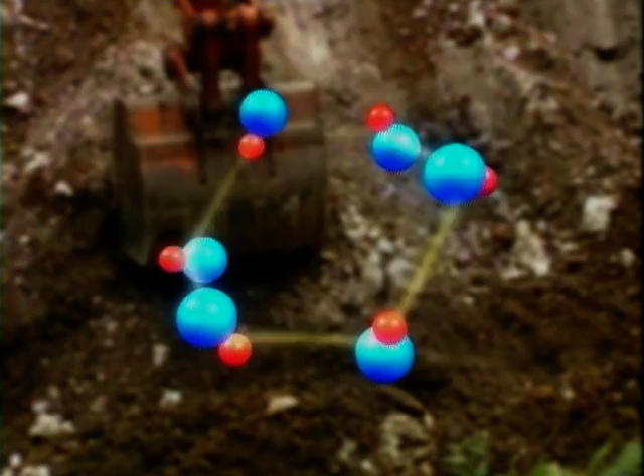HCH stands for hexachlorocyclohexane. It is a waste product that was generated during the manufacture of an insecticide sold under the name Lindane, used in farming and to rid cattle of parasites.

For every kilo of Lindane produced, the process generated 9 kilos of HCH isomers with no commercial value. This waste was dumped with no control, usually on land close to the production site.

Lindane production at the Bilbao Chemicals plant in Baracaldo, Vizcaya, ceased in 1987, but the problems arising from the dumping and lack of proper management of HCH waste in the Basque Autonomous Community persisted.

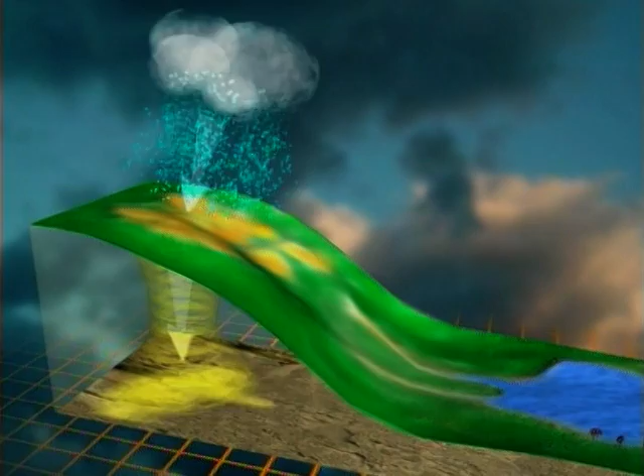As can be seen from the illustration, the waste was carried on the rain and wind, causing it to pollute surface and groundwater and the soil itself. Fumes released from these pollutants due to high temperatures also affected air quality in the area.

Some of the affected areas are used for grazing and crop farming, and others are zoned for urban or industrial development. All these uses entail risks for human health and ecosystems.

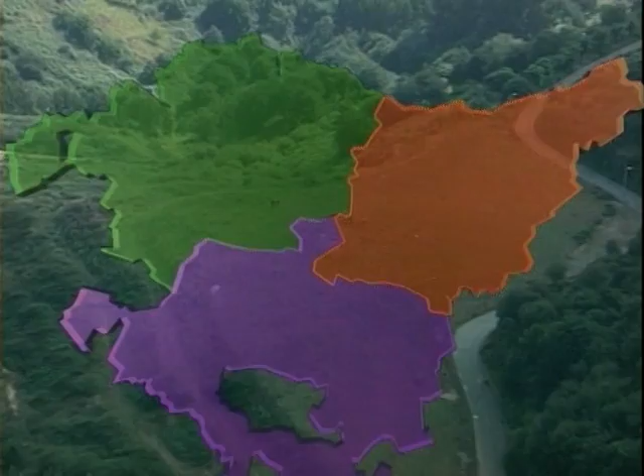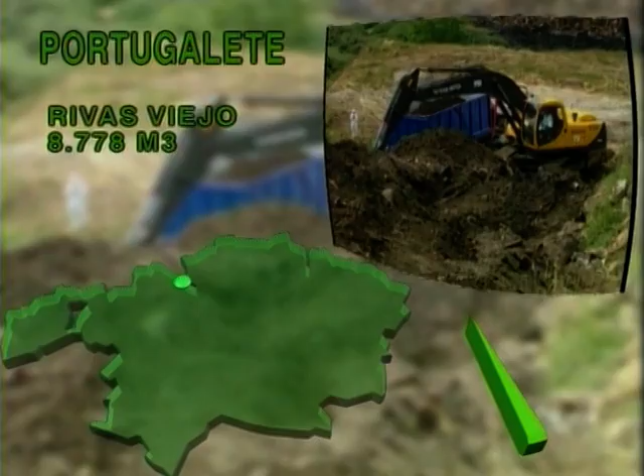Over time, HCH waste dumps contaminated large volumes of soil, especially on the following sites. In the municipality of Portugalete, Rivas Viejo, with 8,778 cubic meters, and Polígono Industrial SIA, with 2,543.

In the municipality of Sestao, Babcock Wilcox, with 5,987 cubic meters. In the municipality of Ortuella, Mina Orgonera, with 784 cubic meters, and Paraje Concha, with 1,092.

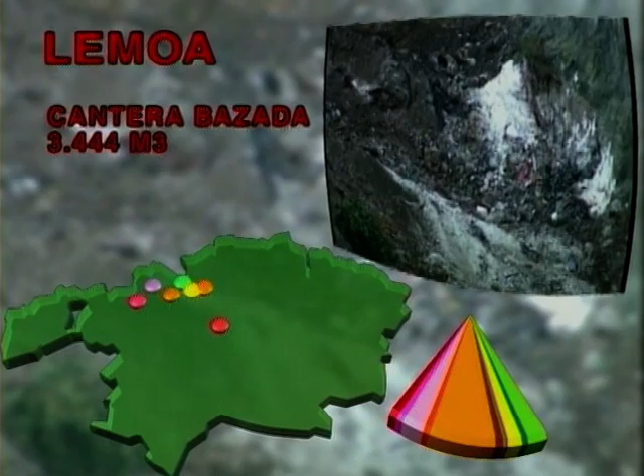In the municipality of Abanto, Cantera Matilde, with 9,104 cubic meters, and Paraje Meastegui, with 2,938. In the municipality of Lemoa, Cantera Bazada, with 3,444 cubic meters.

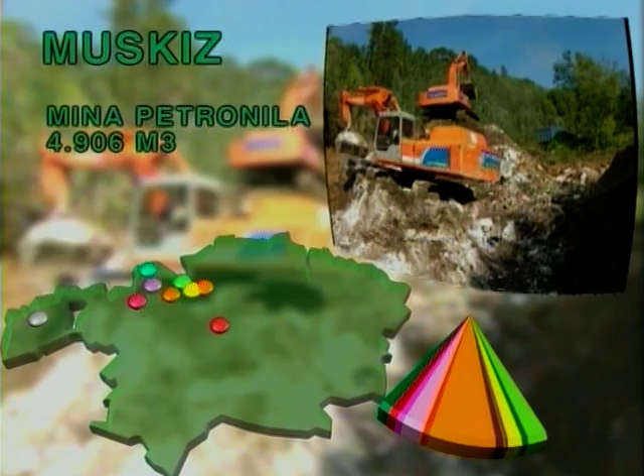In the municipality of Carranza, Paraje Villanueva de Presa, with 615 cubic meters. In the municipality of Muskiz, Mina Petronila, with 4,906 cubic meters.

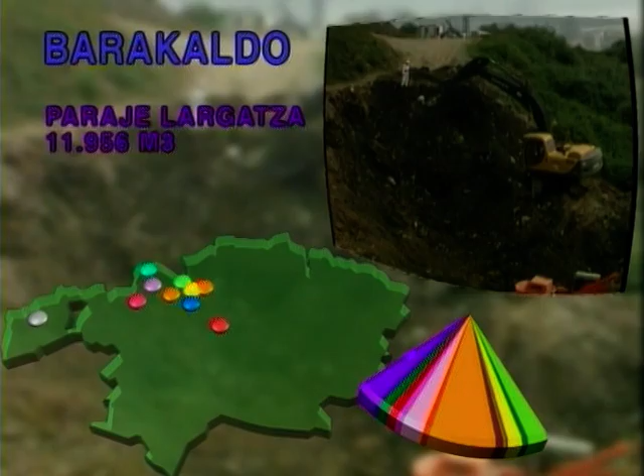In the municipality of Barakaldo, Paraje Largatza, with 11,956 cubic meters. Idanor Bilbao Chemicals, with 78,788.

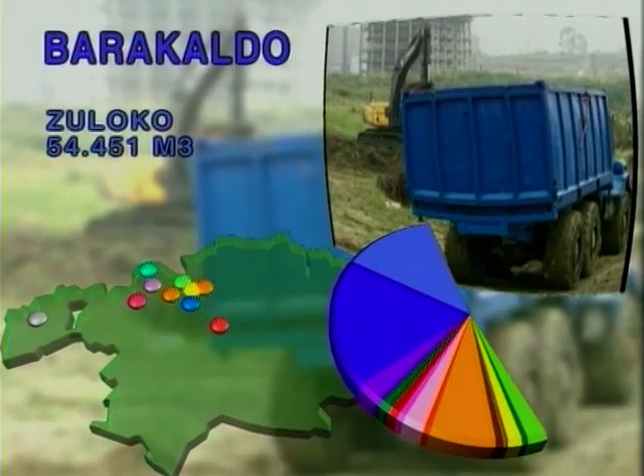Zuloko, with 54,451. Las Julianas, with 2,352. Frade, with

62,530. Vega Galindo, with 43,286. Efersa, with 30,170. Camino Sirga, with 12,482.

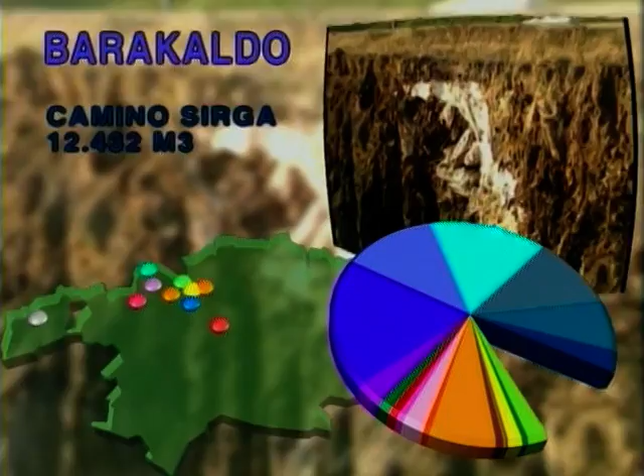Bilbao Exhibition Center, with 5,306. Urban, with 4,974. And Errequeta, with 37,916. These last two sites were contaminated by heavy metals rather than HCH.

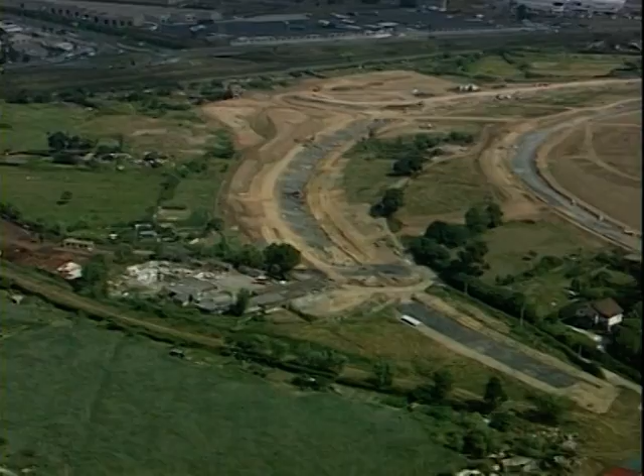The failure to manage HCH waste properly resulted in risks to human health and prevented the land affected from being used for agriculture and commercial or industrial development.

To find a solution to this situation, the Basque Government Department of Land Use and the Environment asked the publicly owned environmental management company, IHOBE, to study how other countries had dealt with similar problems.

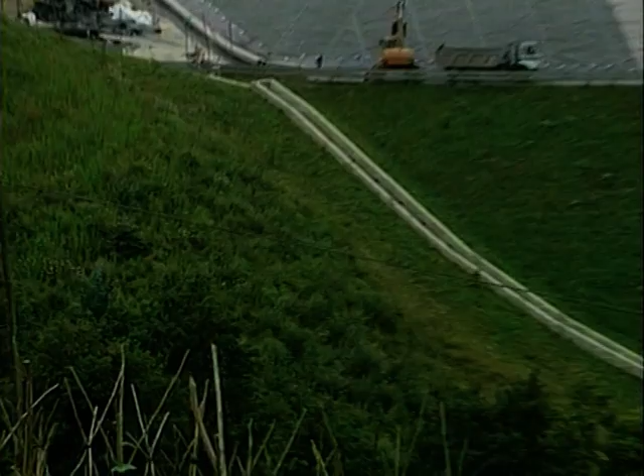The points considered in seeking a solution included environmental impact, proven viability, technical effectiveness, and cost. In this case, the project was co-funded by the EU's Cohesion Fund.

Several options were considered, and it was eventually decided to eliminate the pure HCH waste by a process known as BCD, which stands for base catalyzed dechlorination.

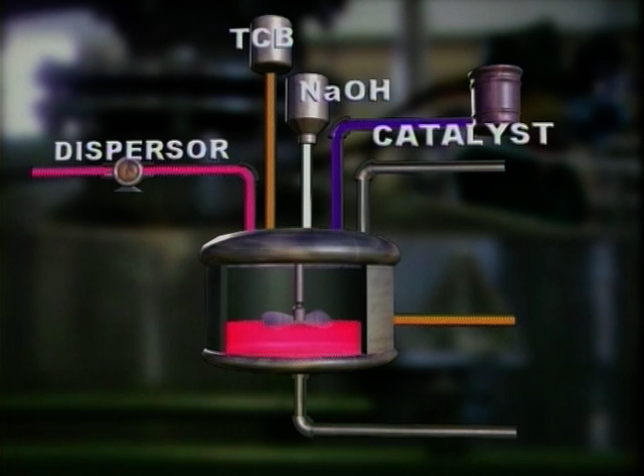And to confine the waste that was mixed with other substances and soil contaminated by uncontrolled HCH dumping in a safety landfill.

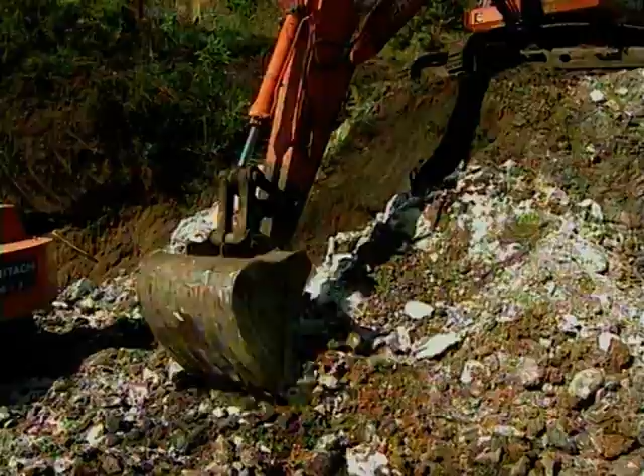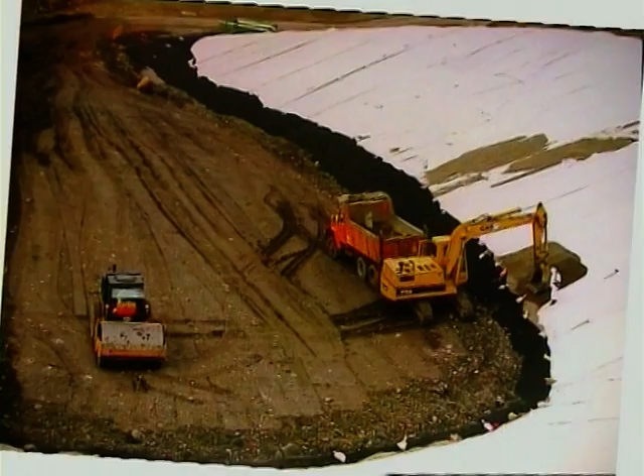This method had been tried and tested at international level and was also used by IHOBE itself in the construction of the Loiu safety landfill, where a total of 113,118 cubic meters of HCH contaminated soil removed from land owned by Bilbao Airport was confined.

In 1995, IHOBE staged a public tender for the preliminary environmental impact study into the location of a safety landfill. The area to be considered extended through all the municipalities on the left bank of the Nervión River estuary and the mining area of Vizcaya, since it was there that most of the sites to be cleaned up by this project were located.

Various options were identified, described and assessed, and the site finally chosen was Argalario, an area which was contaminated and severely run down.

It housed the old Baracaldo municipal solid waste dump for the municipalities of the left bank and lay in the municipality where around 85% of the HCH contaminated soil was located.

This study was subsequently backed up by another, performed at the request of the technical committee set up specifically for this project, taking the whole municipality of Barakaldo into account.

The site selected was environmentally and structurally unsound. The waste from the old dump was unstable. There was pollution of ground and surface water, and noxious gases given off by the site deteriorated the local air quality.

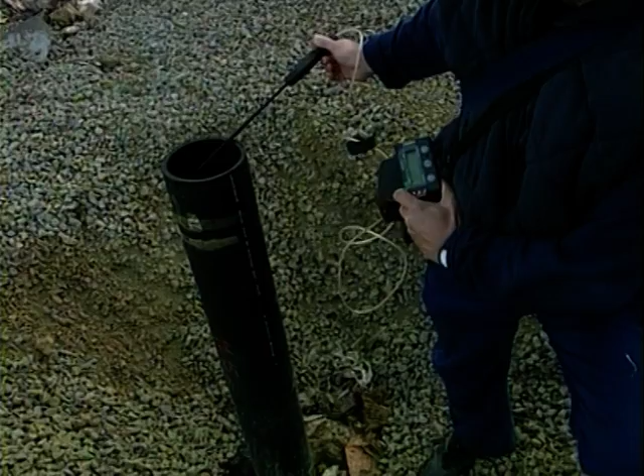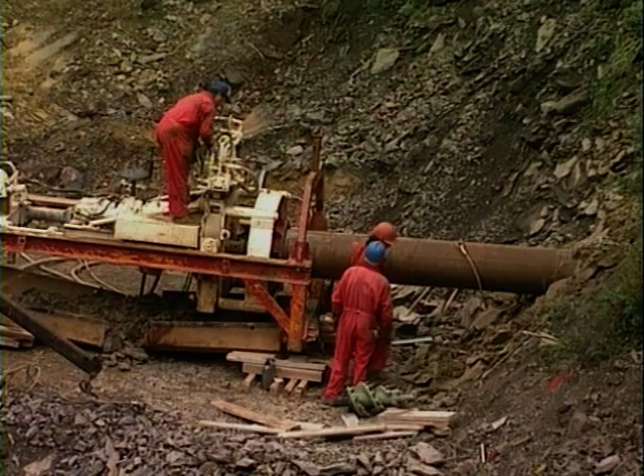The project set up by the Basque Government Department of Land Use and the Environment, acting through IHOBE, was ambitious in environmental and technical terms. Its goal was fully to recover the old dump site before the safety landfill was built. This was to be done in the following stages.

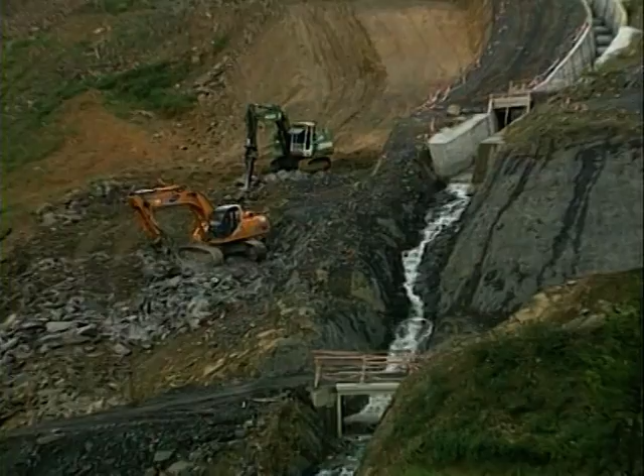The first step was to collect runoff water into a system of canals along the perimeter of the site, then to canalize the river Bortsaco, adapting it to a new course and sizing it in accordance with hydrological calculations.

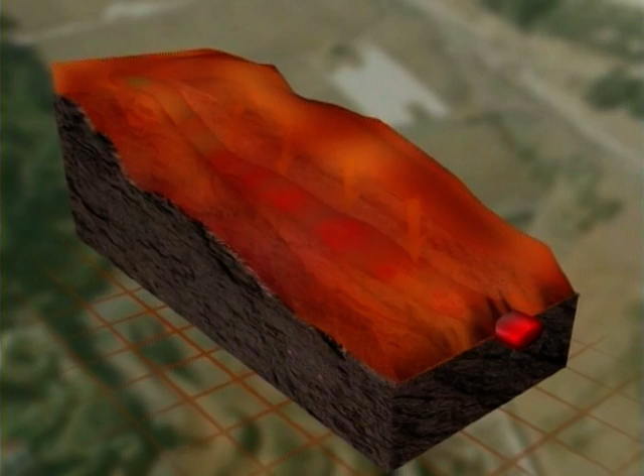The instability of the waste in the dump meant that the internal water table had to be taken down by building vertical gravel drains.

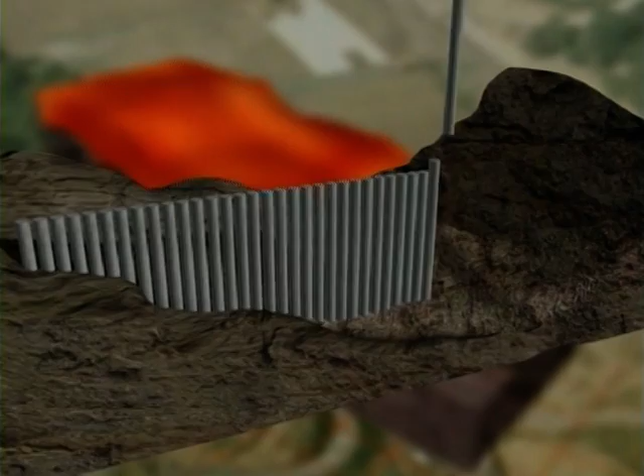At the same time, a reinforced concrete containing wall was built, comprising 49 posts of 1 meter in diameter by 18 meters in height in front of the drainage columns, linked together by 3 transverse beams 69 meters in length, and attached to the natural ground by 38 anchors.

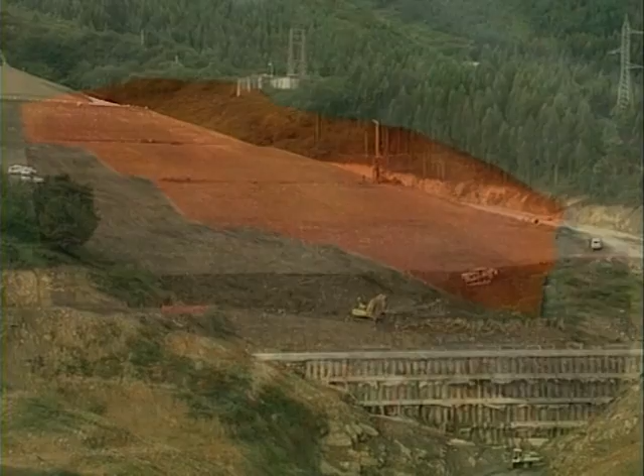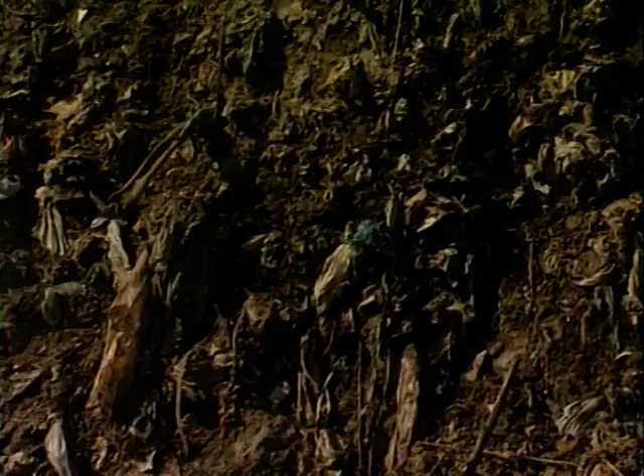When the containing wall was complete, the dump site was reprofiled with berms 4 meters wide, separated by 10-meter gaps. During the work, not only municipal waste, but also industrial and sanitary waste was found.

Collection of leachates from the waste dumped at the site was greatly facilitated by the vertical drains built onto the back of the posts in the containing wall and a barrier-type collector along the foot of the wall.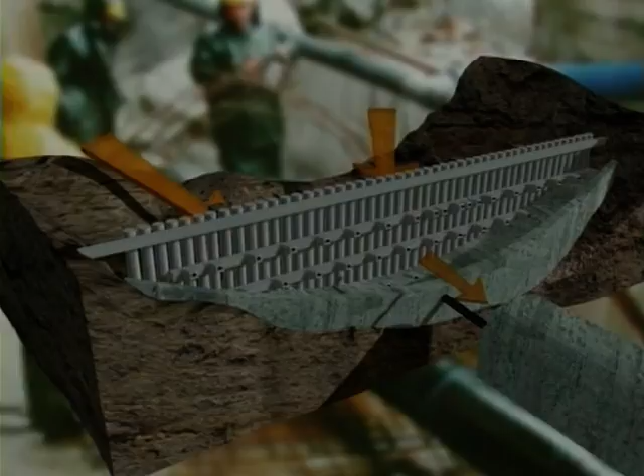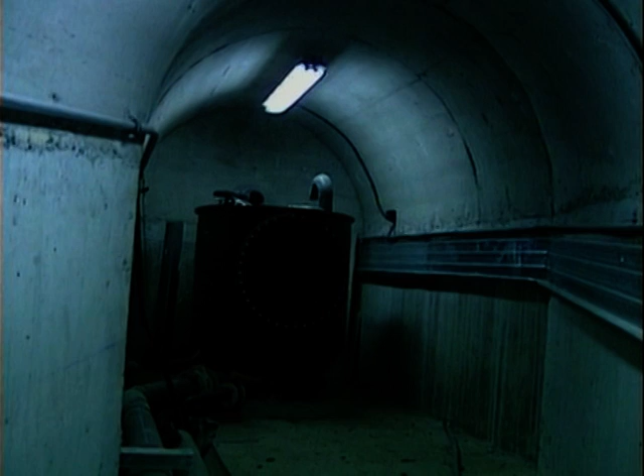Leachates are carried in a reinforced concrete conduit measuring 1.6 meters wide by 2.2 meters high by 230 meters long. To prevent the air from becoming fouled, a 23-meter high stack was built at the end opposite the entrance point to ventilate the conduit.

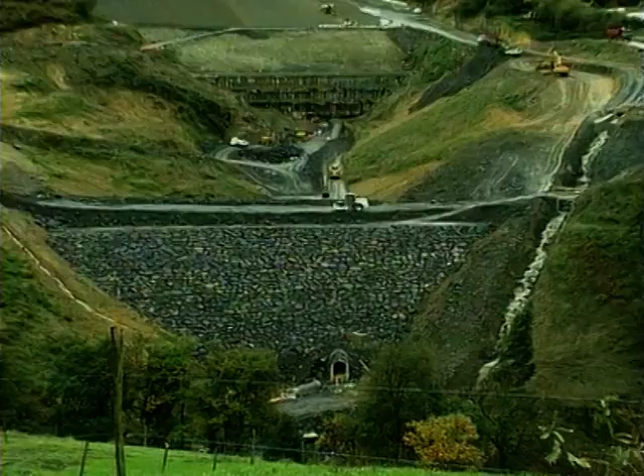This conduit runs under the safety landfill and carries the leachates from the dump in a polythene pipe, which extends from the collector where the leachates converge to the treatment plant.

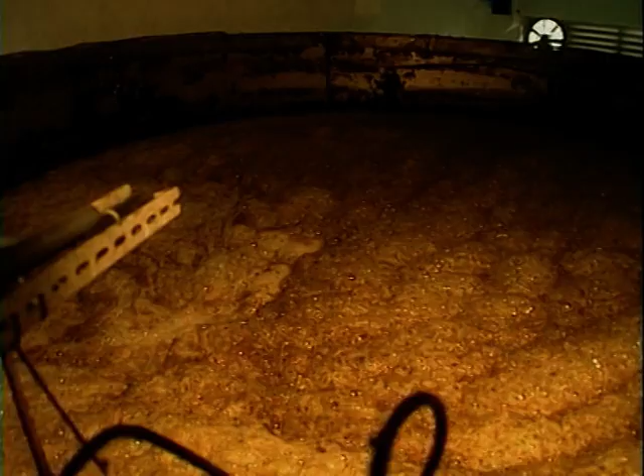A biological treatment system was designed on the basis of analyses of the leachates from the MSW dump and the Basque Government Water Department's requirements for discharges to sewers. As shown in the illustration, this system involves a nitrification process enhanced by bacteria in an oxygen-rich medium to turn ammonium into nitrates.

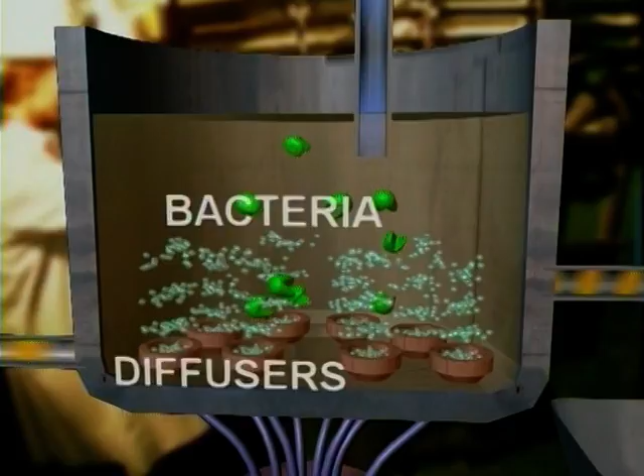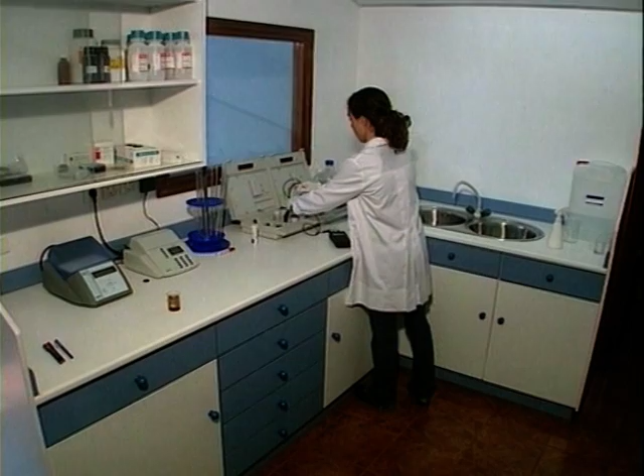The concentrations of the various substances to be tested for are checked, and if there is no problem, the water is discharged into the municipal sewerage system.

Decomposing organic waste in the dump produces internal reactions which generate biogas, including methane and carbon dioxide. This essentially exothermic process is favored by moisture.

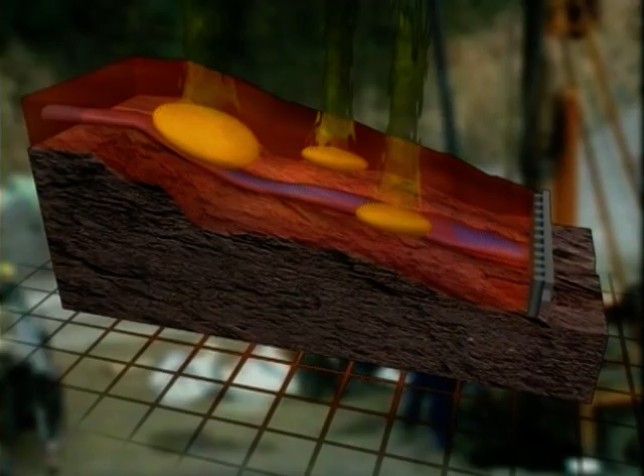Landfill gas can pose major environmental and safety problems for surrounding areas. It also migrates naturally through the various layers of waste in the dump and into the atmosphere, contributing to the greenhouse effect.

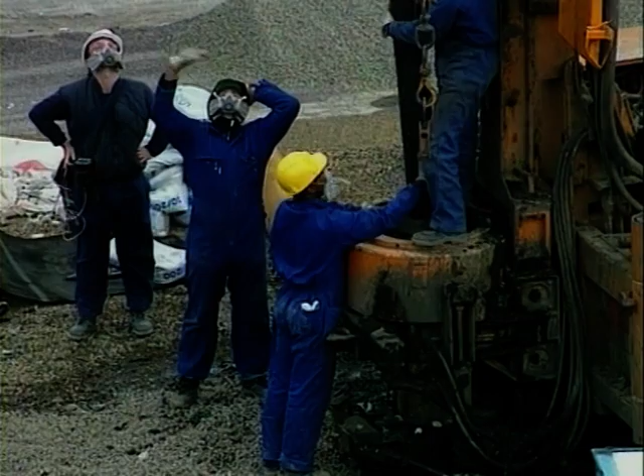The degasification system installed comprises a 30-centimeter layer of gravel over the whole top of the dump and a network of 14 wells connected via polythene pipes to a central exhauster unit.

This unit generates a slight vacuum pressure which draws the biogas into a combustion system, where a burner eliminates it at 1200 degrees centigrade.

Dump sites are capped for two main reasons: to prevent gas from the waste digestion process from getting out, and to prevent rainwater from getting in, thus reducing the amount of leachate produced.

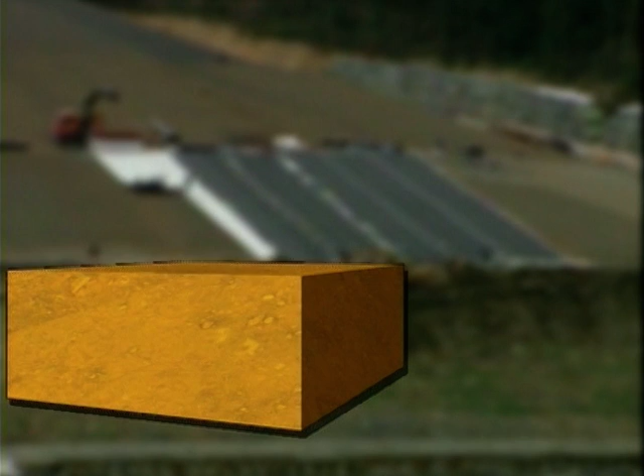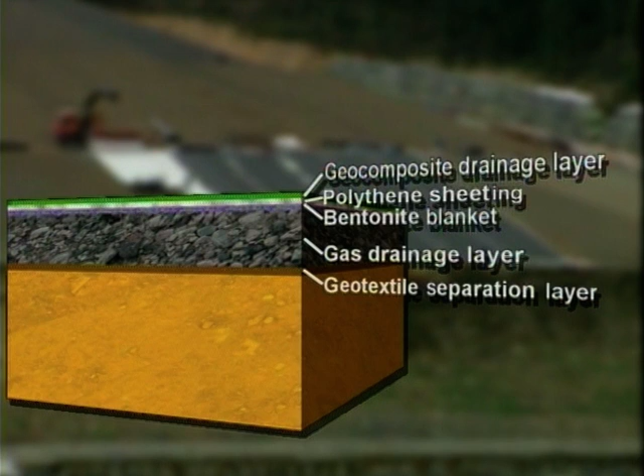This dump is capped with the following layers of material, from bottom to top, including gas drainage layer, geotextile separation layer, gas drainage layer, bentonite blanket, polythene sheeting, geocomposite drainage layer, layer of clayey soil, and layer of topsoil.

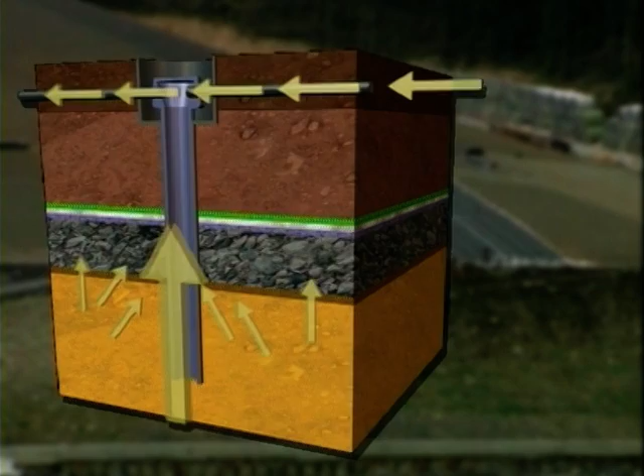The scheme for blending the MSW dump into the surrounding area seeks to achieve two things: to improve the quality of the landscape at the site and to help stabilize the embankments, which have been hydro-seeded and planted out with native species of trees, particularly birch, thus completing remediation of the old Argalario dump site.

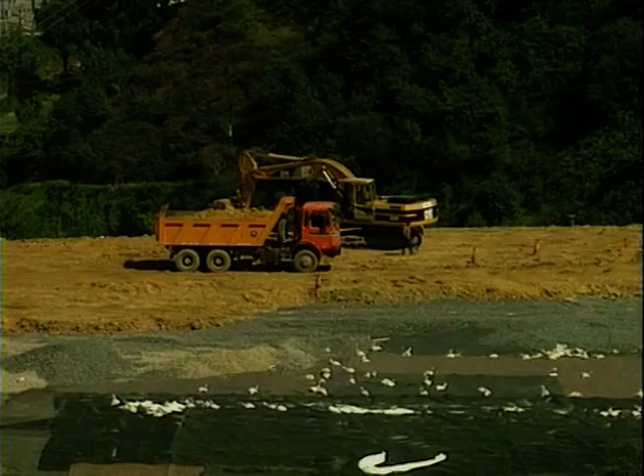Now let us move on to look at the building of the safety landfill itself. Some of this work was carried out at the same time as the remediation of the dump site, but it's described separately here to make it more easily understandable.

A safety landfill is a structure in which contaminated materials can be confined and isolated to prevent them from damaging the environment.

To ensure that surface and groundwater is protected at all times, these landfills are built with a series of sampling points and a continuous monitoring system in a control network.

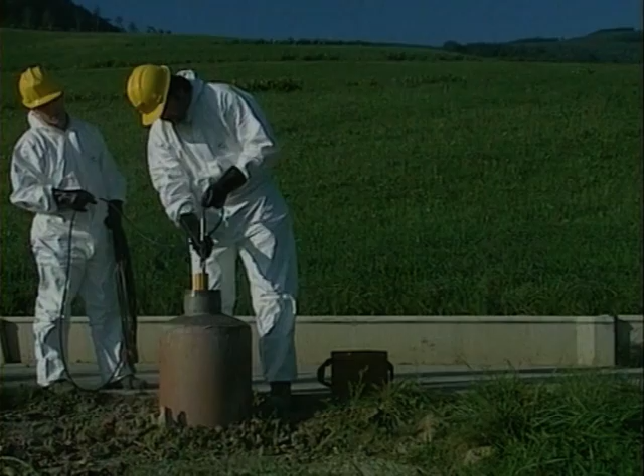The landfill constructed here has a circuit of topographic bases to detect and monitor even the slightest movement in the waste it contains. Inclinometers are also installed to reinforce the measuring system and keep a check internally on the waste.

Leachates from the various layers of waste are collected and carried to an adjacent treatment plant.

Work to shape the safety landfill was carried out at the same time as work to stabilize the MSW dump. Before the work started, 39 oak trees and 6 holly trees growing on the site were uprooted and replanted at the top of Mount Argalario.

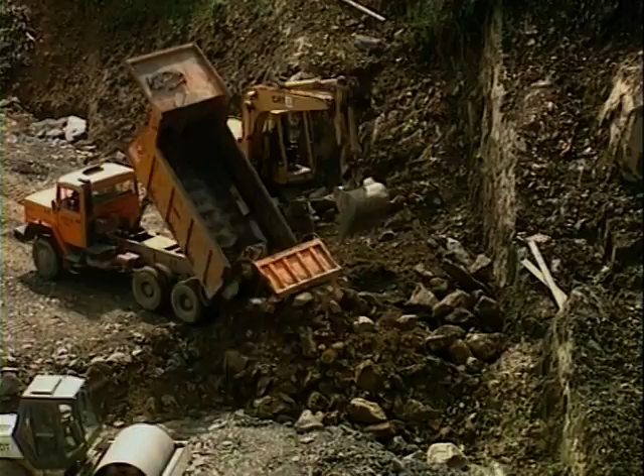Once the site had been excavated to the required depth, the ground was compacted to form a stable floor for the safety landfill itself and the bottom of the leachate conduit.

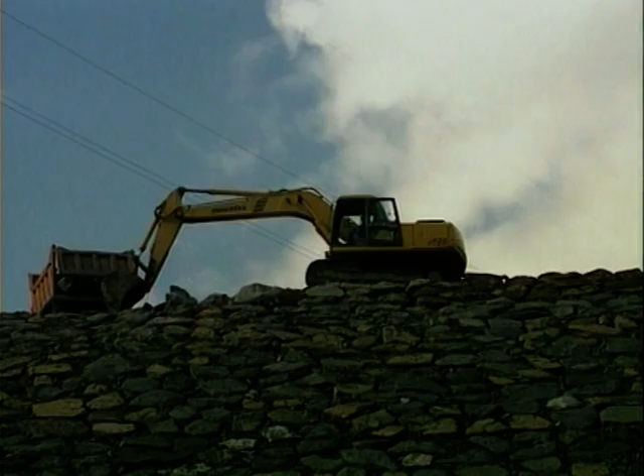The conduit and underground water drainage network were built, then the site was filled in with borrow and embankments were built with the slopes envisaged in the project.

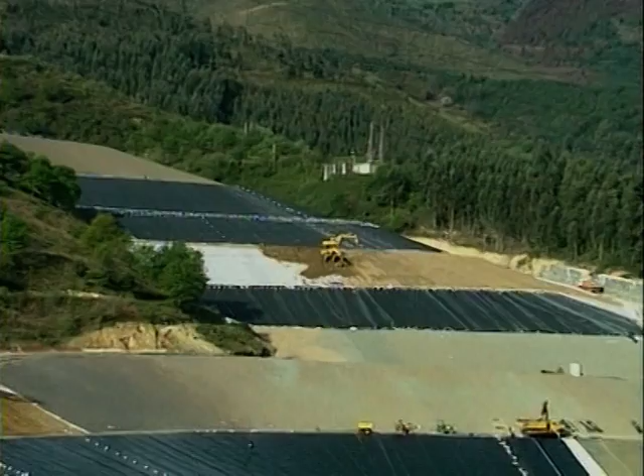At the same time, the containing wall was set up, with a limestone rock fill being laid in the area through which the conduits ran. When construction of the confinement cell and containing wall was completed, the inside of the cell was sealed.

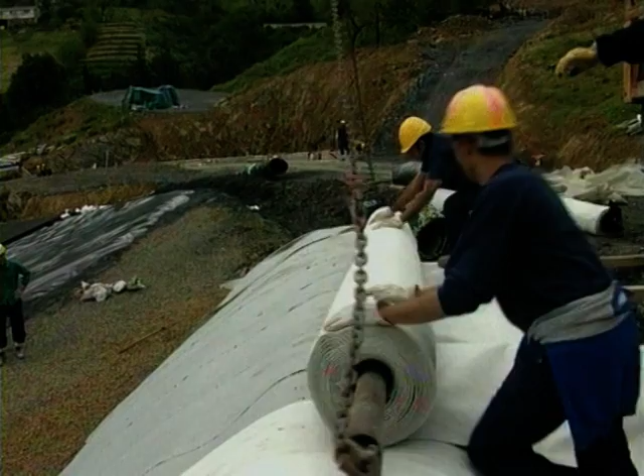The bottom of the cell is sealed, mainly to prevent contaminated materials from filtering into the soil. A blanket of bentonite and a sheet of high-density polythene are fitted to provide a double safety seal.

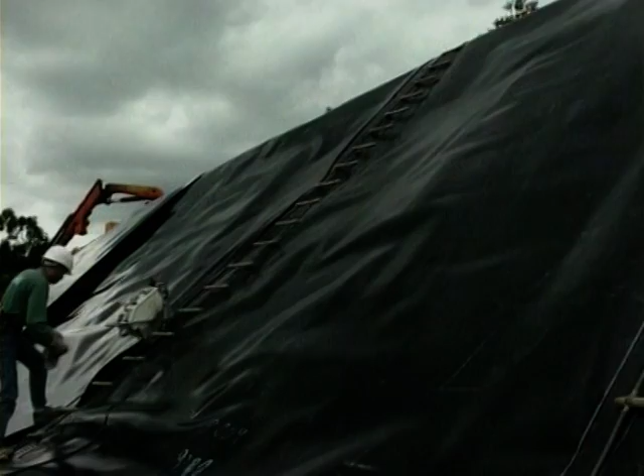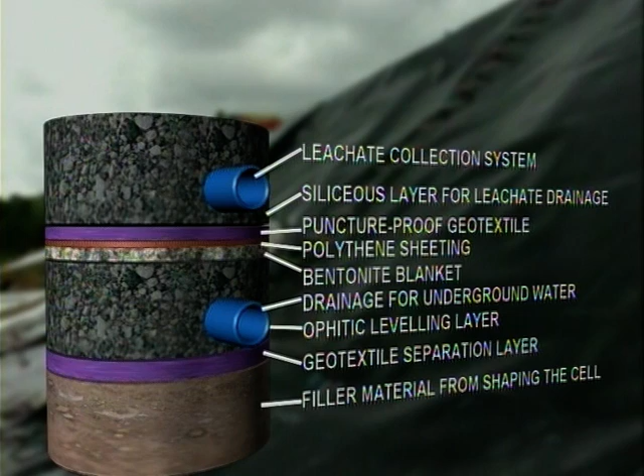The layers in the bottom seal comprise the filler material from shaping the cell, a geotextile separation layer, an ophitic leveling layer, drainage for underground water, a bentonite blanket, polythene sheeting, puncture-proof geotextile, a siliceous layer for leachate drainage, a leachate collection system, a geotextile separation layer, and the contaminated soil.

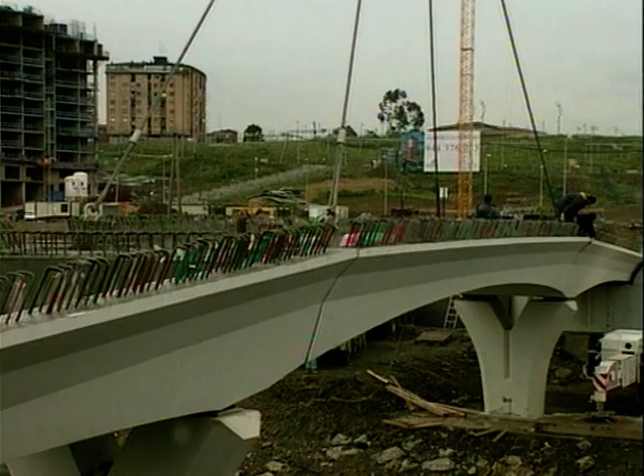Before excavation of contaminated soil could commence, adequate access roads had to be constructed. This involved building a bridge over the River Galindo to gain access to the Soloco Ibarreta area, and dynamite had to be used in some areas to reach the former dump site in Baracaldo.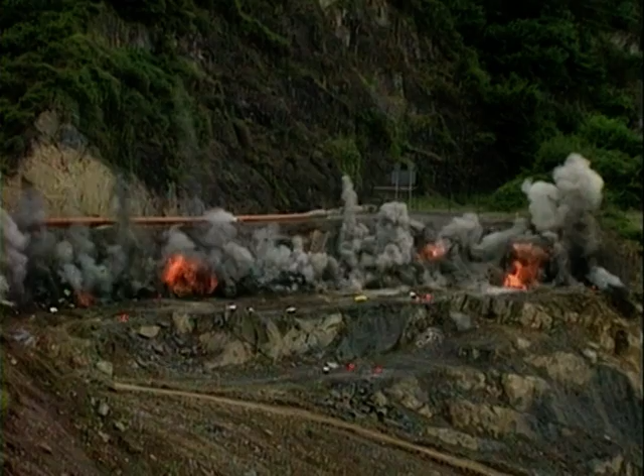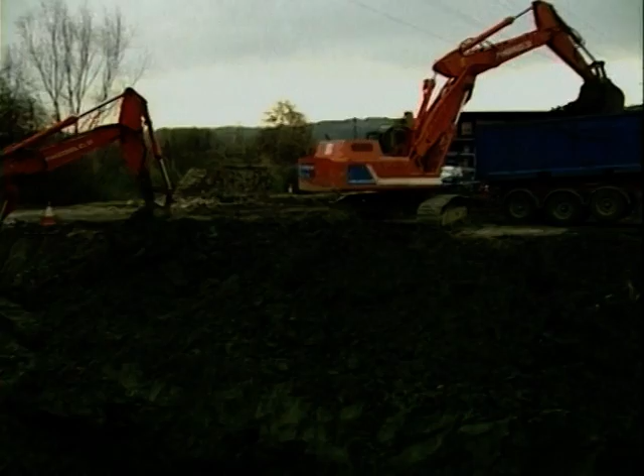The contaminated sites were excavated in 3 phases. Phase 1 involved excavating and removing waste dumped on them. Phase 2 comprised the excavation and removal of the contaminated soil itself.

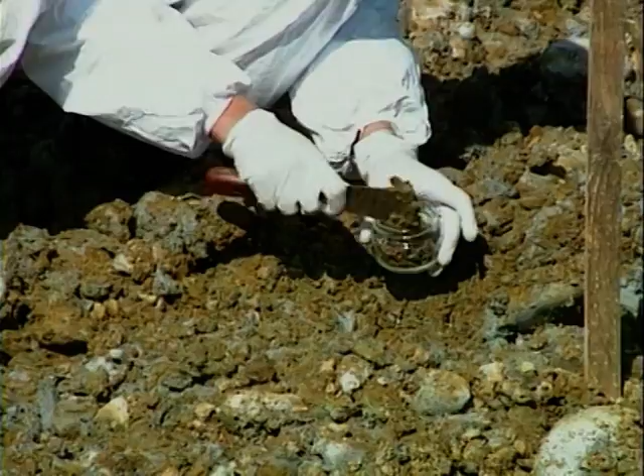The third and final phase involved using a clearing bucket to excavate and remove the top layer of non-contaminated soil to ensure full remediation of the site. The residual pollution levels after this process were below the target figures for the project.

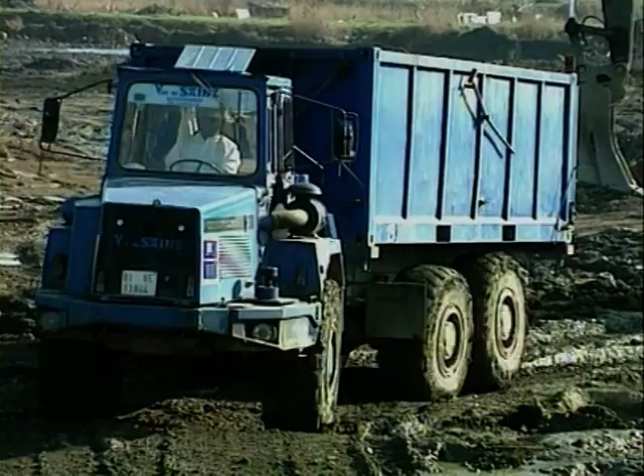The trucks used on the excavation site carried containers only from the point of excavation to the washing station at the transfer platform.

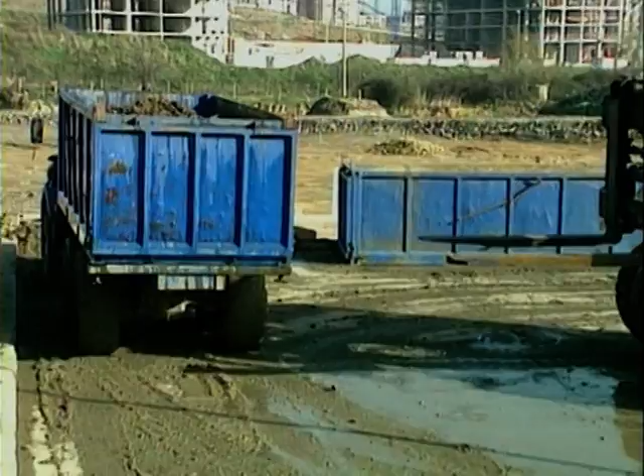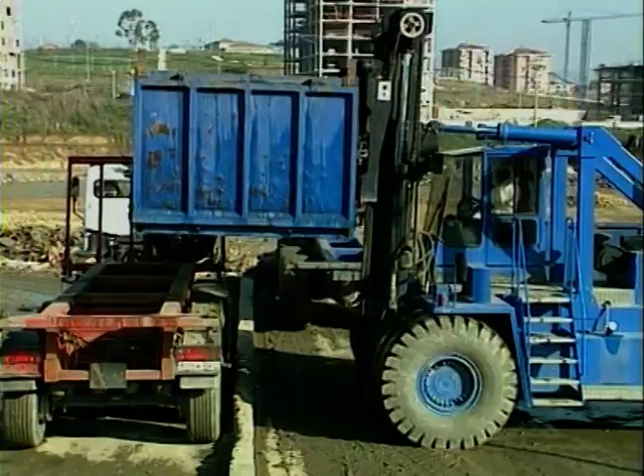There, the outside of each container was washed, and containers were taken by forklift off the truck which brought them in and loaded onto another truck standing in a clean area. The contaminated and clean areas were separated by a dividing block.

Once containers were on the truck, they were taken a short distance to another point, where covers were fitted and the safety system and seals were checked. Only then was permission for transportation given.

On arriving at the unloading platform at the safety landfill, trucks tipped out the contaminated earth and were washed again at a purpose-built washing facility at the unloading point.

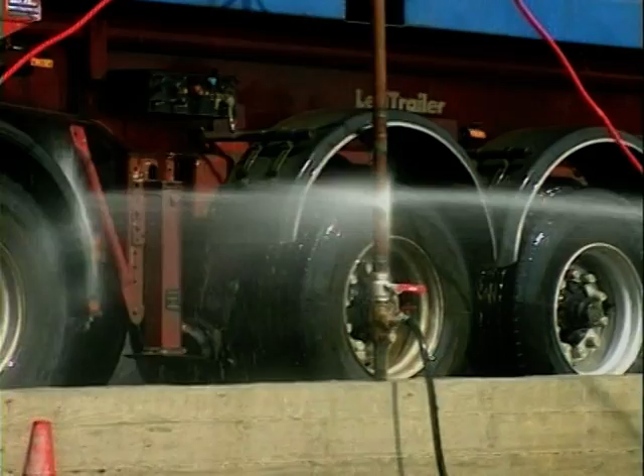The material carried was also checked at this point by means of a route sheet covering the whole operation. Once all these checks were completed, drivers were allowed to return to the start of the circuit.

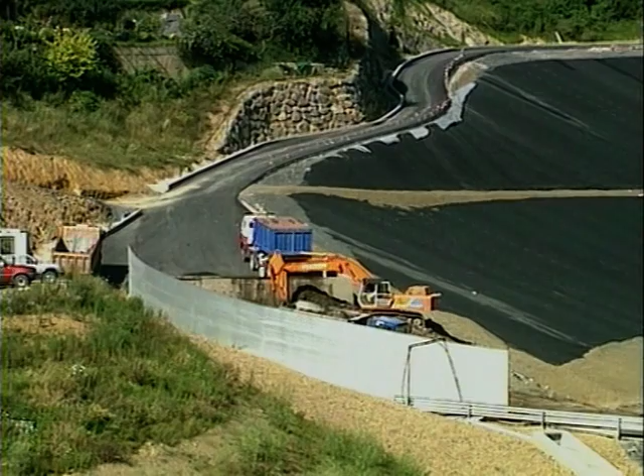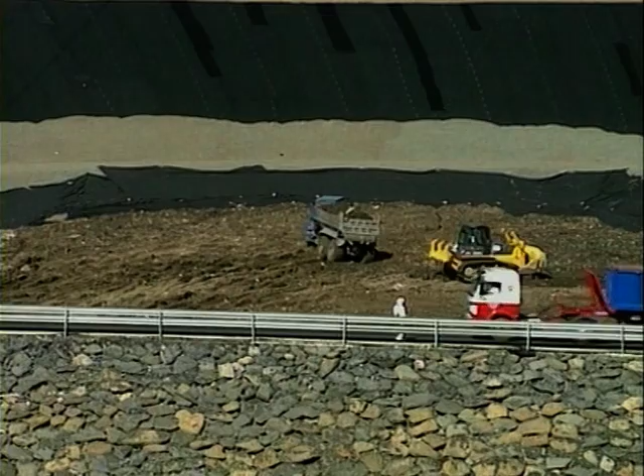The HCH-contaminated soil unloaded onto the platform was loaded by a backhoe excavator onto articulated trucks operating inside the safety landfill. These trucks took it to its allocated confinement area, which was determined by the physical characteristics, moisture level, and degree of contamination of the soil.

The soil was spread by a dozer blade to form tiers 50 centimeters thick, which were then compacted to the degree calculated as optimum using a roller.

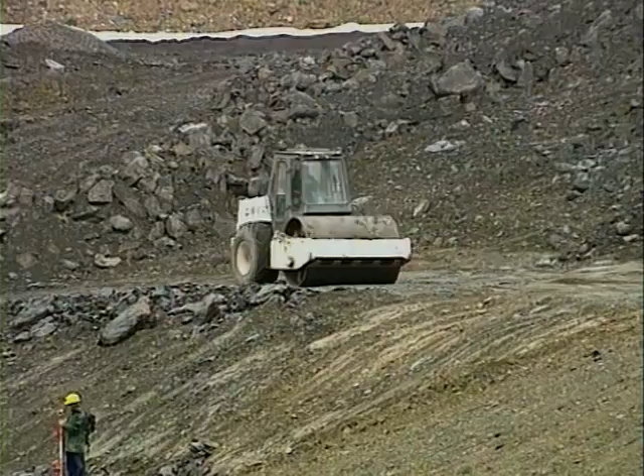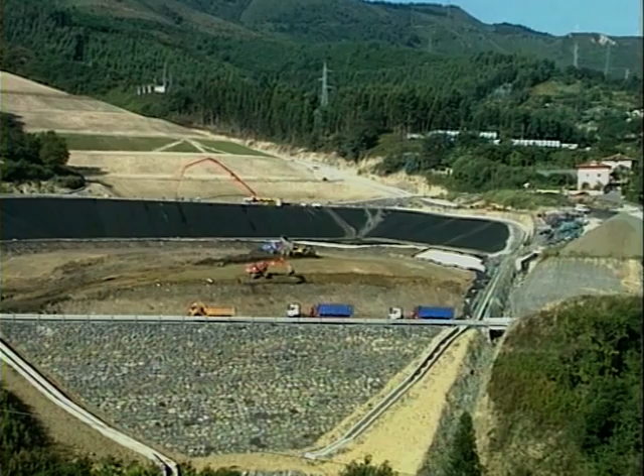Geotechnical tests were then performed, and if all was well, a further tier was spread on top. Hardcore beds had to be laid at some levels to enable trucks to drive over the top of the waste.